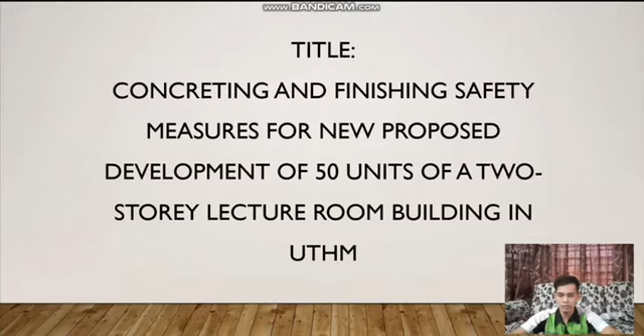The given title is Concreting and Finishing Safety Measures for New Proposed Development of 50 Units of a 2-story lecture room building in UTHM. First of all, I'm going to introduce myself. My name is Muhammad Hassan bin Martua, matric number DF170057.

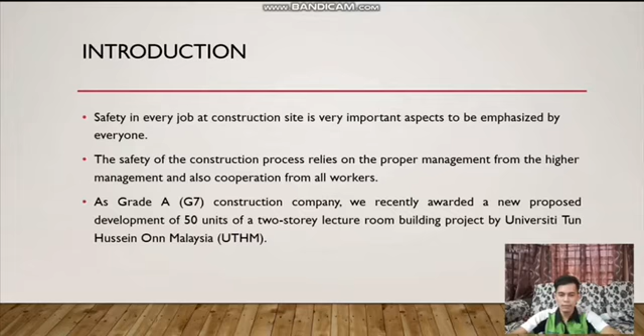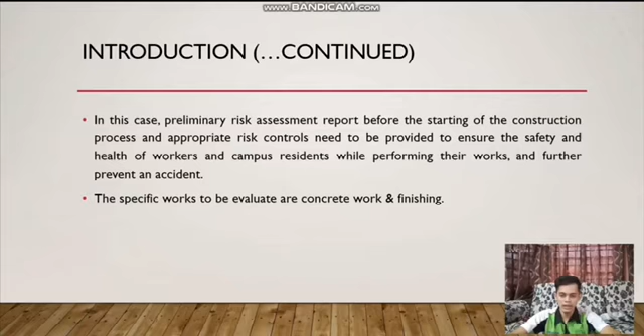For introduction, safety in every job at a construction site is a very important aspect to be emphasized by everyone. As a Grade A G7 construction company, we recently were awarded a new proposed development of 50 units of a 2-story lecture room building project by Universiti Tun Hussein Onn Malaysia. In this case, a preliminary risk assessment report must be provided to ensure the safety and health of workers and campus residents. The specific works to be evaluated are concreting work and finishing.

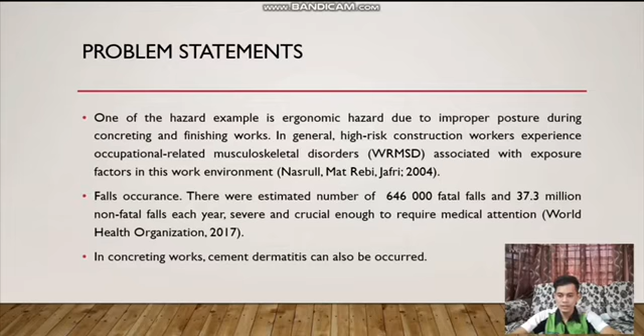For the problem statements, one of the hazard examples is ergonomic hazard, then fall occurrence, and lastly cement dermatitis because of concreting works.

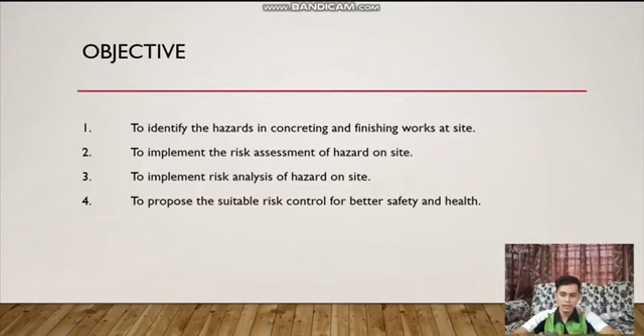Next, the objectives. Number 1, to identify the hazards in concreting and finishing work at site. Then, to implement the risk assessment of hazard on site. The third one is to implement risk analysis of hazard on site, and lastly to propose the suitable risk control for better safety and health.

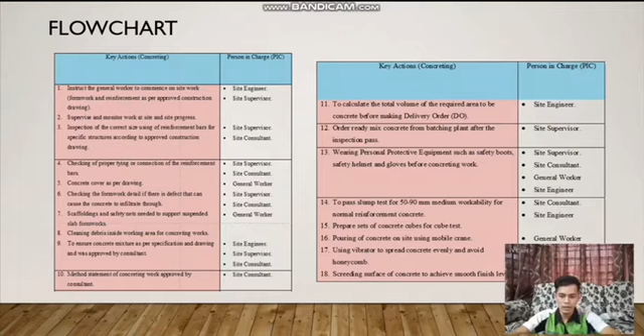Followed by pouring of concrete on site using a mobile crane, using a vibrator to spread concrete evenly and avoid honeycomb, then screeding the surface of concrete to achieve a smooth finish level, followed by assigning a flagman for the operator of the mobile crane to have better vision, then inspection of concreting work to avoid mess of concrete at nearby roads and cause hazard, scooping and cleaning need to be done.

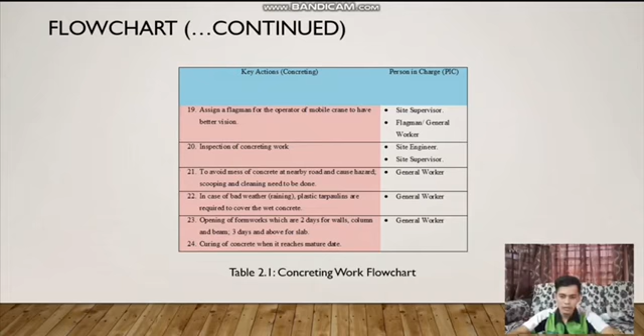In case of bad weather, plastic tarpaulin is required to cover the wet concrete. Opening of formwork, which is 2 days for walls, column and beam, 3 days and above for slab. Curing of concrete when it reaches mature date.

All these tasks have a person in charge to avoid any accident happening.

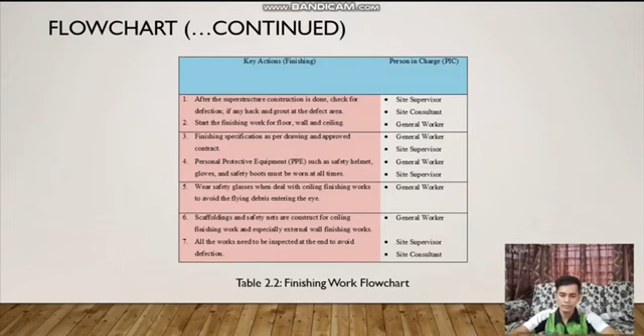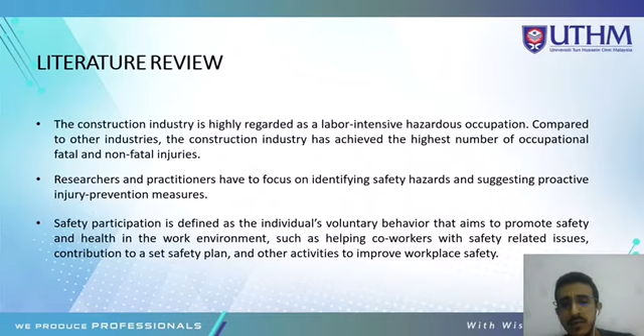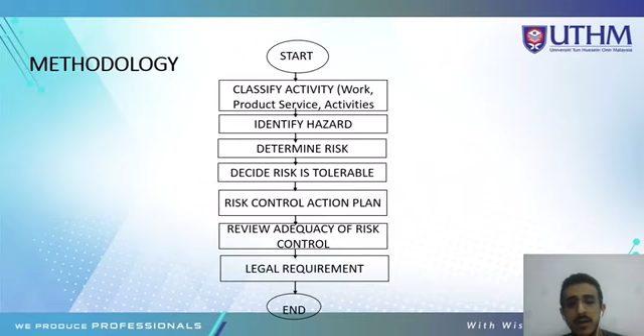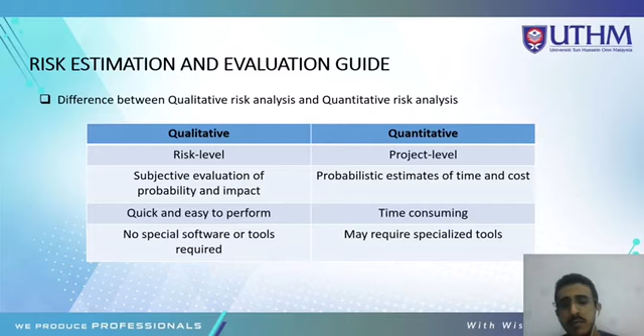Quantitative analysis will be time consuming. And finally, no special software or tool is required for qualitative analysis, while quantitative analysis may require specialized tools.

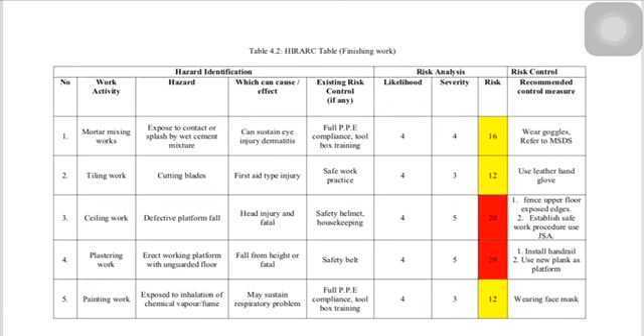For the most critical health hazard, it is exposure to splash by wet cement mixture. This risk of injury depends on the situation and duration. The harm sustained can be permanent, can damage the skin, lungs, and cause allergic reactions. Precaution is wearing personal protection equipment such as gloves, long sleeves, and waterproof shoes.

In conclusion, the first step is to identify and analyze the hazard. Hazard identification and risk assessment can be used to set priorities until the most dangerous situations are known.